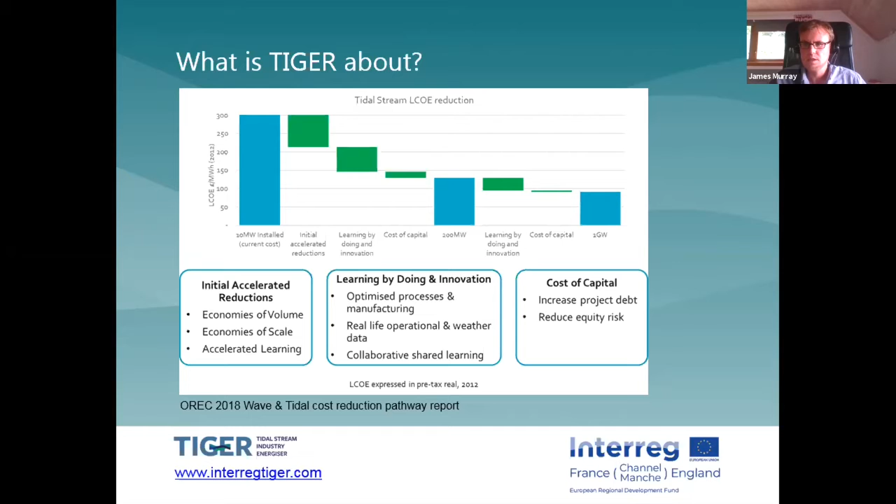So then just moving forward to some of the specifics in terms of the sites that are being developed in the project, we've got very good representation from both sides of the channel. To put it in context, there is the potential for over 4 gigawatts of tidal stream capacity within the Channel region alone. So a huge potential for a whole new generating sector. We've got representation from all the main tidal resource regions, from the Raz Blanchard and the Gulf of Morbihan, and Paimpol-Bréhat on the French side. We've got representation associated with PTEC on the Isle of Wight.

And we've also got other strategic developments such as Ramsey Sound outside the Channel region, but a very important part of the overall program, that are also carrying out activities and testing within the project as well. So within the project is a target for up to 8 megawatts of deployment, which would be very much a success because it's a reasonably short project to consent projects, to build machines, and to commission those projects, and 8 megawatts would be a great contribution towards accelerating the sector. But following on from that, a huge potential to consent further sites and see further deployment of arrays after the project has completed.

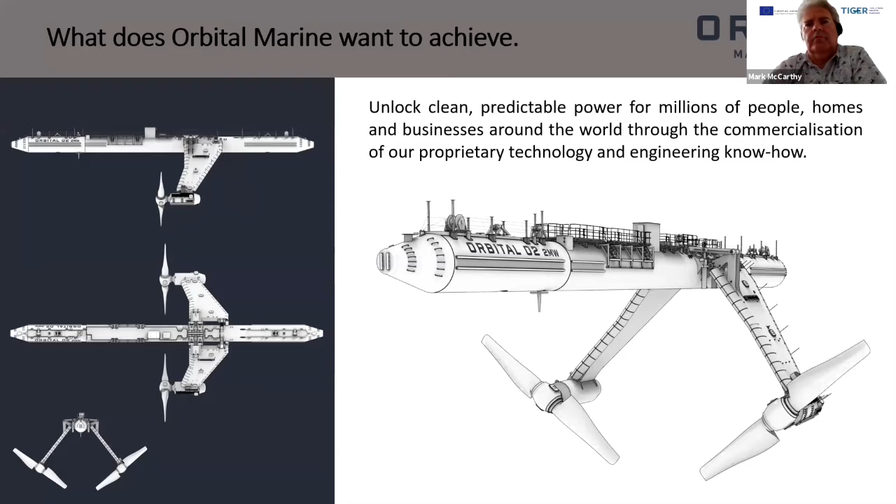So I'd alluded to our first breakthrough project in 2016. This was, at its time, the world's largest tidal turbine at around about 2 megawatt rated. So there were 2 1-megawatt nacelles, each with 16 meter rotor diameter rotors. For that particular device, we had stall control rotors, so variable speed rotors that allowed a relatively simple PTO within the nacelle, rather than moving to variable pitch,

which we believed at the time was a step too far in terms of development. We didn't have the resources at the time to develop a pitch system. There were plenty of other challenges and problems to solve before getting to that stage.

So the SR2000, or SR1-2000 as it was rebranded, was a 500-ton machine, and the hull structure is formed of sub-arc welded cans. So it's a tubular structure that is fairly well suited to automated rolling line processes.

The leg structures underneath are beam structures in simple terms, but it was all a fabricated structure, and the same with the nacelles. The tube structure, I think, weighed about 230 tons, the legs were around about 20 tons, and the nacelles, just the steel work, were around about 15 or 20 again.

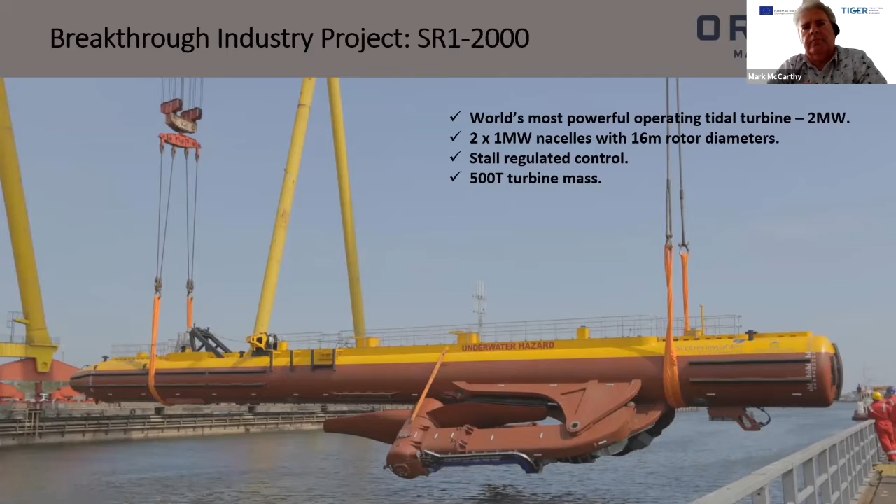So, Mark, do you want to talk about a little bit of construction philosophy? Yeah, move on to the actual cross-section of the turbine. As William said, the key here in terms of manufacturing was to obtain a design that worked for the supply base. With the work that the team had already done on the SR2000, we knew what diameters would work for our various suppliers in Scotland. So we kept effectively the same hull diameter.

And William and the mechanical team had done the design of the turbine in accordance with its structural integrity, what was required to meet the objectives of a 25-year life cycle. What we were able to do then was to develop a construction strategy for the fabrication of the O2 turbine. We broke it down into modules, in effect, and went out to talk with the supply chain about their capabilities.

So we were trying to match the capabilities of the supply chain within Scotland and the UK to the capabilities and the engineering requirements of the O2 turbine. So what this meant basically was to understand what the craneage, what the door width, what transportation requirements were for the various suppliers, so that we could optimize the size of the individual components for their manufacture.

Certain elements of the O2 were fabricated and manufactured in-house. The blue elements that you can see on the slide there were actually our own design. We actually manufactured those skids in our workshop in Orkney, but the fabrication of the steel skids underneath was done locally up in Thurso. So it's not just the large fabrication of the structure, but we've also got a large amount of smaller fabrications, both within the turbine itself and also outwith the turbine.

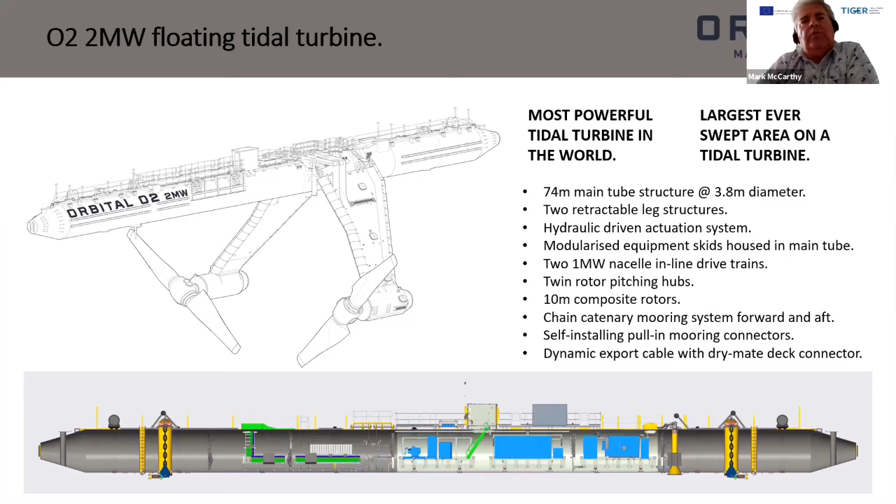A good example of this is on the screen at the moment. This was done by competitive tendering and was manufactured on the island of Anglesey by a company called Faun Trackway. These are 4 anchor baskets, gravity baskets, that were fabricated in Wales. So the design again gave us flexibility to go to various suppliers, both in Scotland and the UK, to enable us to get a competitive price.

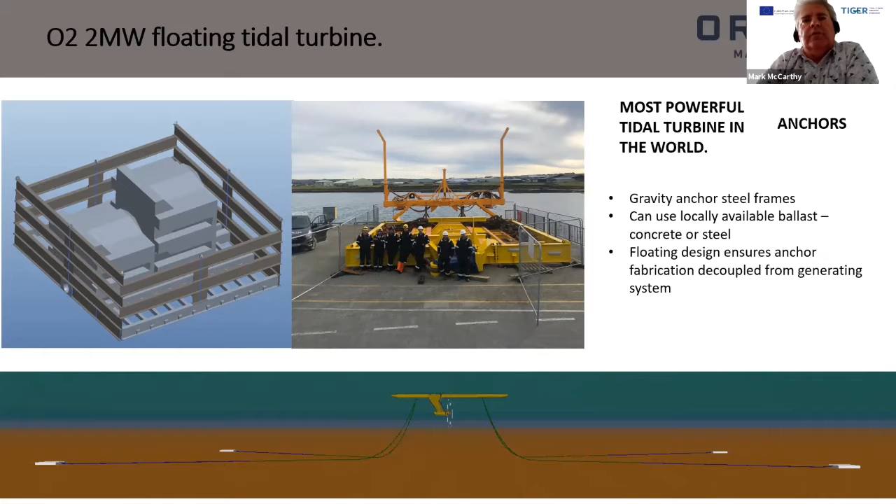So moving on. When we come back to the larger fabrications, as William said, we have a structure that is required to meet the engineering integrity. So William, if you want to explain how we decided to split the turbine down into the various sections. Yeah. Okay. So Mark pointed out there the whole strategy behind the design and the tendering. The way that we broke it down was to try and avoid limiting ourselves to one particular destination, so we could cast the net as wide as possible.

So with the superstructure for the O2, we broke the superstructure down into 4 chunks that were all within the road transportation limits. So the width was considered, the weight and the length of each section.

This also applied to the legs, and we've also considered it for the nacelles as well. Now, this allowed, I think, a good number of different people to have an opportunity to get involved with the rolling of the cans, the fabrication of the legs. The fabrication facilities can be inland or coastal. We haven't been limited to just having large quayside facilities.

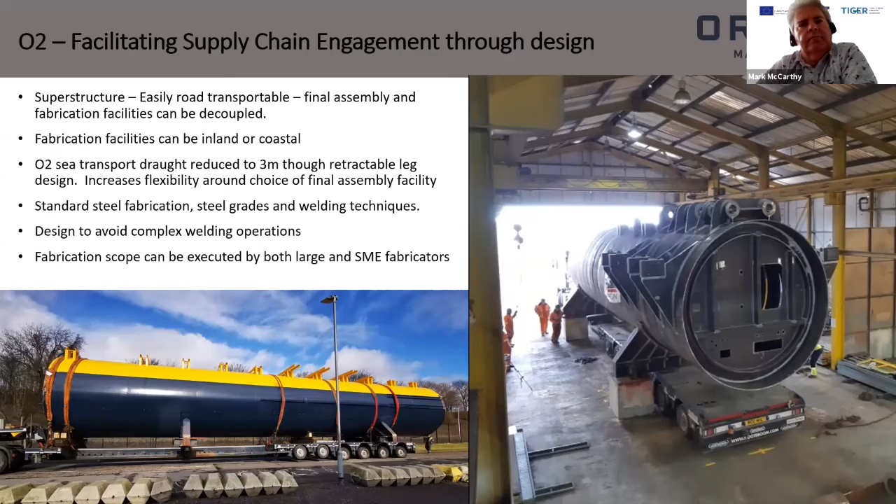Space and access requirements for welders. We've really tried to make lives easier for the welders, rather than have people going into a horrible cramped space with poor access, because all that does is cost money, and it just creates an opportunity for more weld failures, which can cause severe disruption in the build process. You really just want to avoid it from design, rather than having to rely on the best welders and luck as well. So all this work, I'll let you go into a little bit more about the contract strategy.

Yeah, obviously, in addition to standardized techniques, as William's explained, we also went for standardized contracting, an oil and gas type contract that people were familiar with. And the net effect of casting the net wide, standardizing the design and using techniques that people were familiar with is we ended up with a very wide supply base within the UK. A lot of Scottish content, Gray Fabrication, TEXO here in Dundee, but we've also got contractors as far afield as Gosport and Anglesey. So basically, UK supply chain is very well represented on the O2.

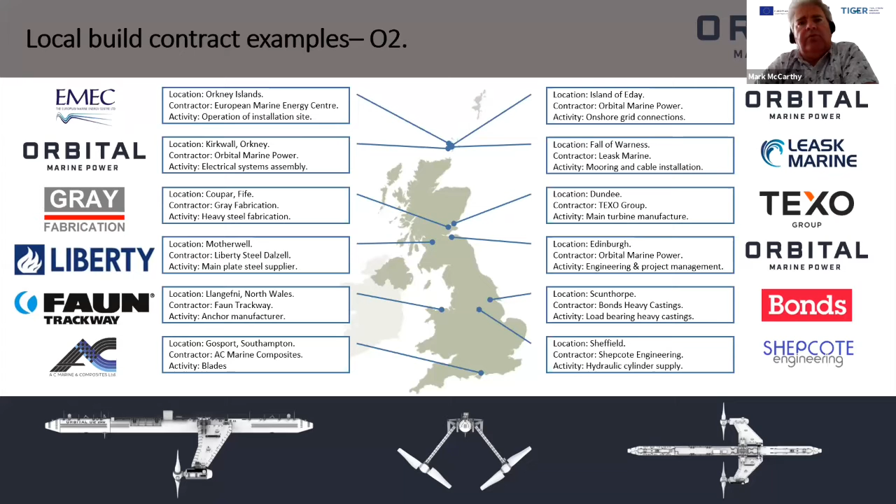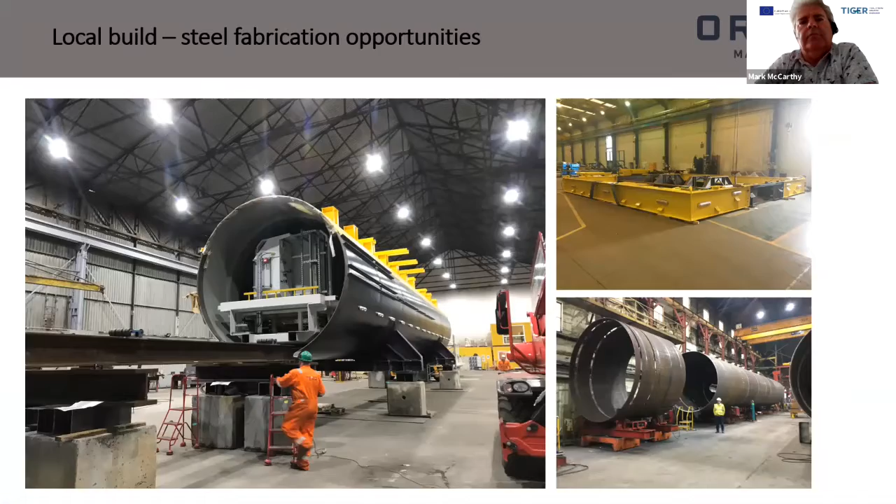Some pictures of the various steel fabrications in manufacture. You can see William there adding scale to the size of the cans on the bottom right. But we've also employed European contractors. The powertrain, which sits on the end of the legs, is actually manufactured and assembled by one of our partners, SKF. So they've got components coming from Sweden, from Germany, Czechoslovakia.

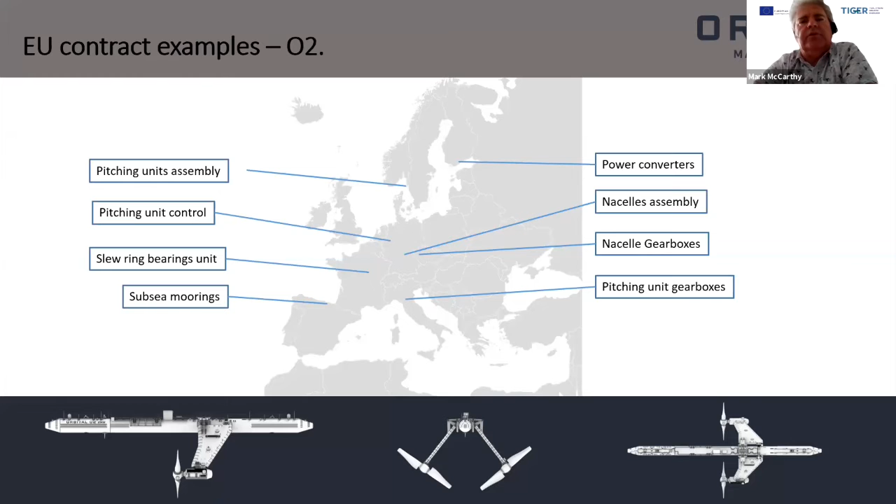And I'm glad to say, actually, all of the components are moving around Europe now, heading towards Germany for assembly in a manufacturing plant near Schweinfurt in Germany. So all of these components were supplied under one major contract with SKF. Yeah, you can see an example of some of the components courtesy of SKF. We've got the gearboxes, top left, and the gearboxes arrived in Germany fully tested.

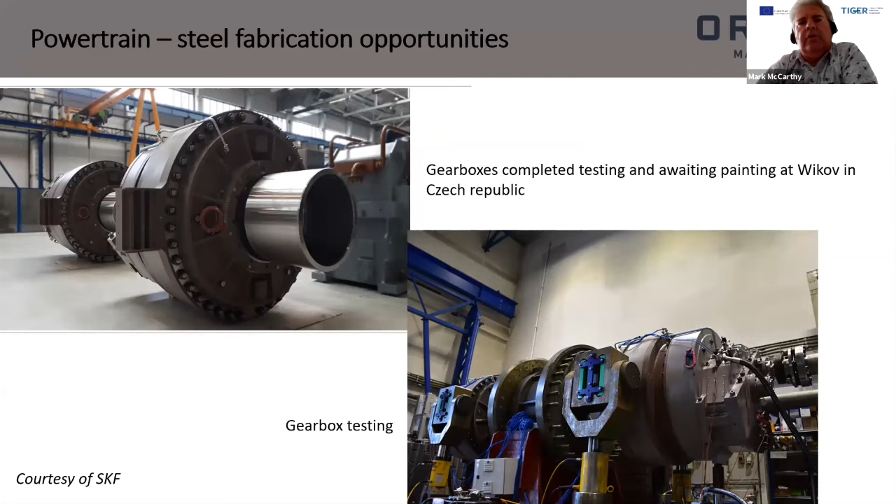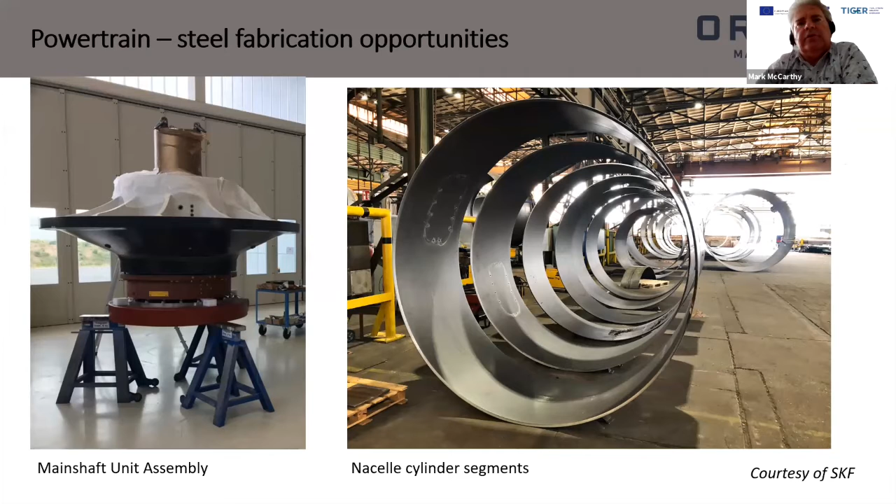And again, some components which have now arrived in the assembly hall in Germany. We've got the main shaft unit, which has been assembled and tested and has arrived in the assembly hall. You can see on the right-hand side an example of fabrication from one of our German colleagues. They are manufacturing the nacelle fabrication in Germany for SKF.

So individually, when we're developing a single turbine, that brings obviously capability and capacity into focus. But when we move towards larger volume, then obviously the problem becomes a little bit bigger. It basically becomes a space problem. So in addition to the components being quite often at the maximum capacity of some of our suppliers, they're also very large components. So one of the things we need to think about is how can we safely get large volume through our supply chain.

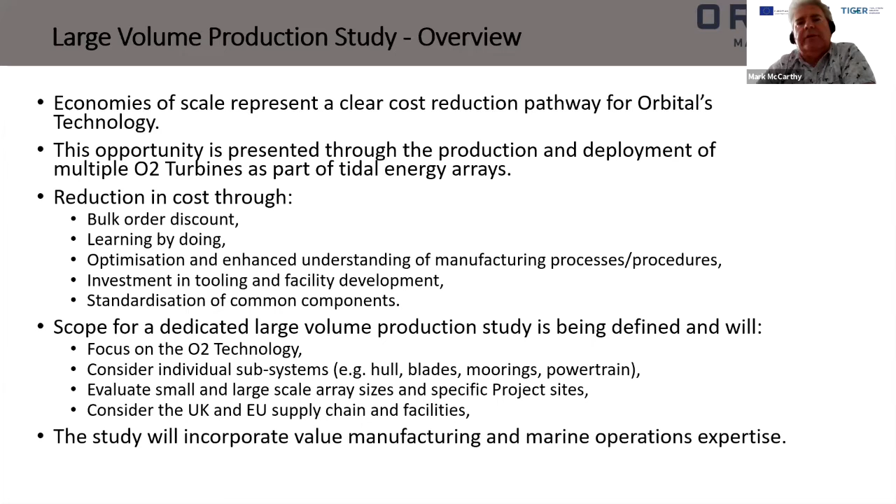So you can look at the number of tidal arrays, look at the number of turbines, estimate how you would break that through into components in a similar way as William's described. We'd need to look at the technology to see if certain suppliers have different breakpoints within the design. So we may have to alter the way that we manufacture certain turbines to suit the manufacturing cycle. But basically we will use the O2 design and the supply chain for the O2 as an example of how to do best practice. And then we'll look at the volume question as a second issue.

So we've done a study looking at the high volume with our partners, Black & Veatch. So again, what we need to do is obviously understand the political funding assumptions within the model, which gives you a geographical net in terms of where the supply chain will be sitting. And then we're going to need to go out and engage with the supply chain at every level to understand their capabilities, their capacities, and the space available.

We also need to clearly understand the timing and the schedule relating to various turbines, particularly when we get into large numbers, and literally just spend time with the supply chain, go out and talk with them, explain to them the size and nature of the components and the volume, and then we can hopefully develop a plan that works both for the multitude of turbines, but also for the supply chain.

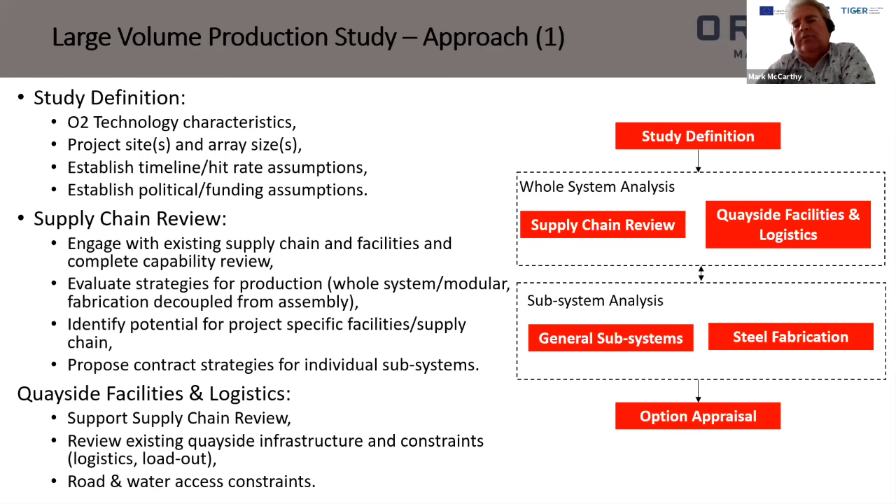The key issue for us is steel fabrication. The O2 turbine and the SR2000 before it were designed specifically as a steel fabrication. The engineering that William and the team have done enables us to break the turbine into different sections so that we can do modular assembly, and that hopefully widens the number of fabricators that could engage with the process.

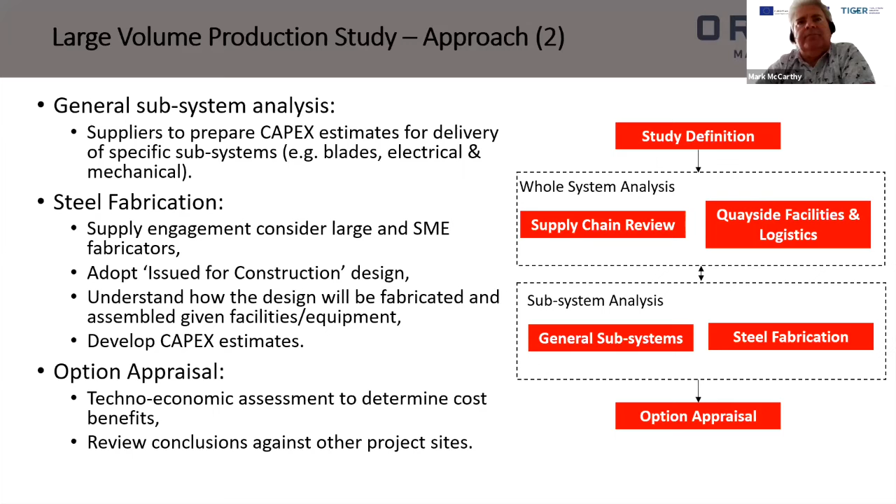So we may end up, to meet a multitude of orders, having a multiple supply chain supplying the same parts in different places, and that'll all have to be assessed in terms of capacity moving forward. So it's a large exercise yet to be undertaken in terms of high volume supply, but we think we made a good start understanding the O2 supply chain. And that concludes the Orbital presentation.

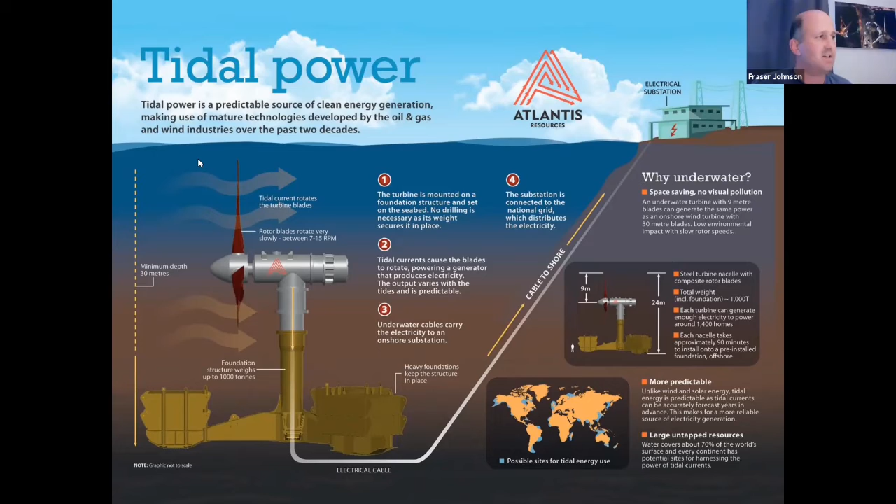In this infographic, it's a gravity-based structure, but they can also be monopiles. But effectively, the unit sits on the seabed under its own weight, in about 40 meters of water on the MeyGen site, and then literally converts the flow of the water in the same way as a wind turbine, effectively. So the main unit for the AR series, it's a 160-ton unit, designed to be installed by standard offshore construction vessel, 250-ton active heave compensated crane, that kind of size.

In the Atlantis design, the main body forms the main structure, so it takes the main load path rather than having an integral frame to take the loading. Modular design, so in this one we have the blades on the right hand side, then a nacelle in the middle which houses pumps, motors, that kind of stuff, yaw drive underneath, and then a stab into the foundation.

On the back we have a generator and gearbox, and on the back of that we have the IO pod where all the controls and instrumentation sits, and beneath that we have the turbine support structure. For the Atlantis turbine, it's all wet mates, so the turbine is installed and recovered in about 90 minutes. No dry mates, so straight interconnection.

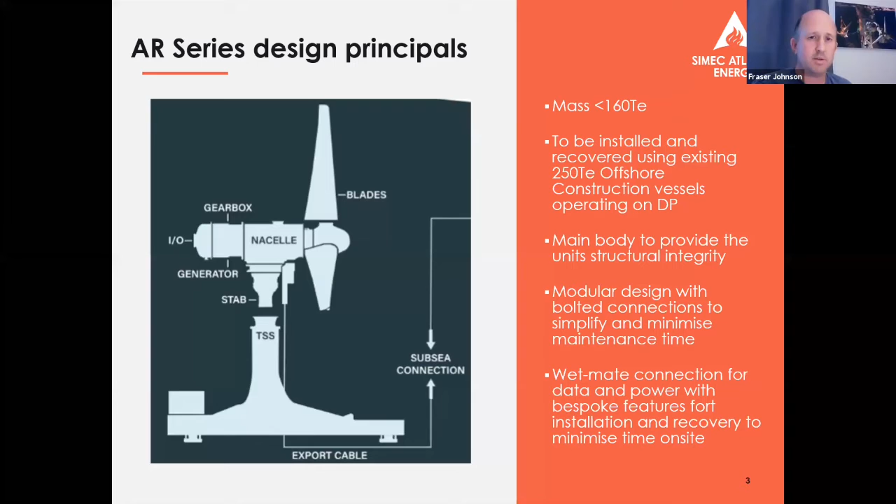The AR series really started design back in July 2011 with an installation into EMEC, and that was a 1 megawatt unit, 150 tons, and again fixed pitch. Didn't need to use the pitch system at that time. They were proving other elements. And then along came the MeyGen project. So within that we have 1 Atlantis turbine and 3 Hammerfest turbines. Not the world's first array, that was Nova Innovation up in Shetland back in 2016.

But the AR 1500 is a 1.5 megawatt unit, again 150 tons, variable pitch, and a yawing mechanism. So it actually rotates to face the oncoming tide on every slack tide.

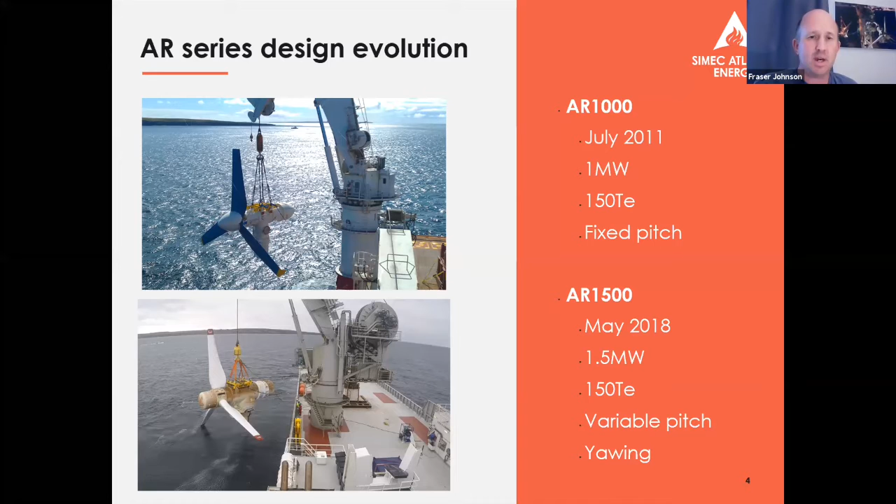As I mentioned, we also have Andritz turbines, so just to show you the comparison or difference between the two. They're still horizontal axis turbines, but just 2 slight variants from 2 different suppliers. So here we have 3 Andritz turbines. They are more akin to an offshore wind turbine. So they are an external shell keeping the water out.

And then they have a frame, a load frame on which all of the equipment sits, torque isolated. So standard generator, standard gearbox, and a water cooling system. So unlike Atlantis, where the exterior hull of the structure is the exterior hull of the generator and gearbox for cooling, this is forced ventilation, or forced cooling.

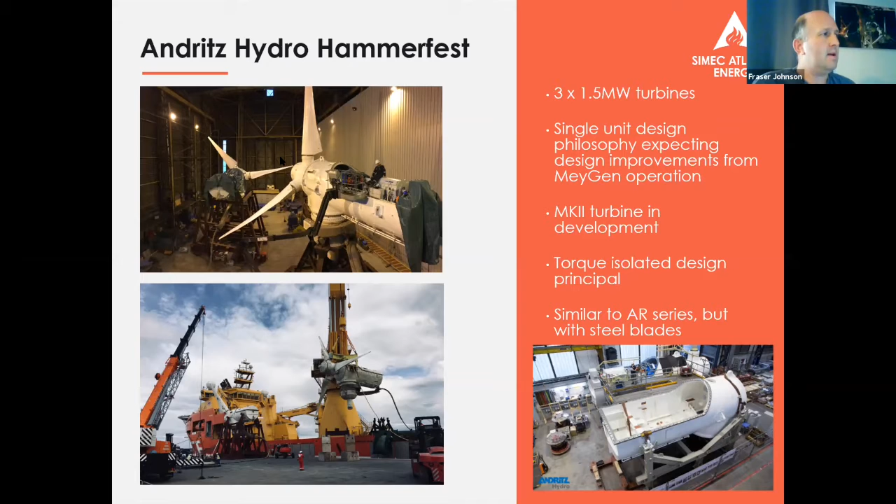So I'm going to take you through the main components of the turbine, the main modules as we call them, and highlight areas, structural elements that we buy in, and then kind of identify where Atlantis have engaged with the supply chain with regards to the components, to the main nacelle, the yaw, and so on.

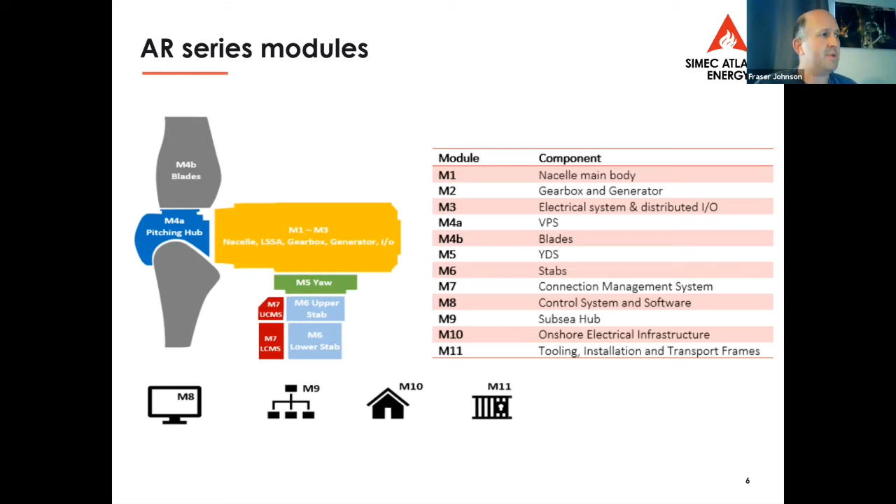So the nacelle itself, it's a 20-ton cast lower section and fabricated top section steel structure, bolted flange on both ends to take the generator and gearbox on one end, and the slow speed shaft on the other. So the photograph in the middle must be going back to June 15 now. That was at the Nautilus facility down in Blyth, a test bed owned by Catapult. That was where the unit was put together and then tested before being supplied into MeyGen.

But effectively it's a steel structure, nothing overly clever. The AR 1000 unit was all rolled steel and fabricated, whereas this one's lower section is cast. And that's really to take cost out. Going forward, a 2 megawatt and a 3.5 megawatt unit certainly looks at the entire unit being cast, and engagement with the supply chain around how that could be done here across Europe or further afield.

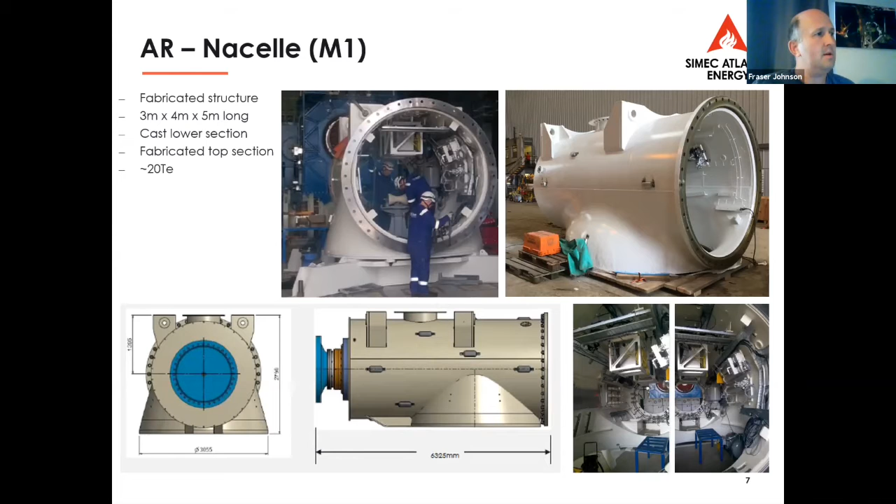Then we go on to the gearbox and the generator. So in the AR 1500 at MeyGen, we have a permanent magnet unit for the Atlantis turbine, and then we have a squirrel cage induction generator for the Hammerfest, but it's an integral gearbox generator. This came out of The Switch over in Finland. 17-ton unit, and 32-ton unit for the gearbox and generator.

And then the slow speed shaft, which is a 17-ton forged steel unit. Again, basic manufacture, forging and then machining to make the slow speed shaft. And the slow speed shaft and the generator are actually so long, and the nacelle is also so long, to balance the weight of the structure.

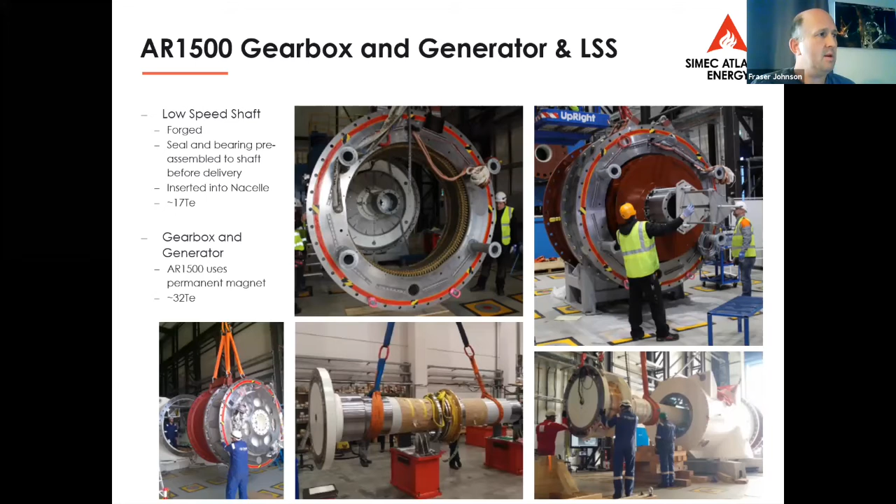So on the front, you've got the blades, and you've got the yaw drive and the hub. And of course, on the back, we have the generator and gearbox, and that balances the unit for lifting and also below water for sitting on top of the structure. So there are some details as to why they are so large. We've looked at making the nacelle smaller and making the entire package smaller, which is possible, but brings in other operational considerations.

The stab, effectively a large cast unit. The individual cast structures, so the turbine sits on the seabed under its own weight. It doesn't have any bolting or connection mechanisms. The top design is the unit from the AR1000, which was installed in the early part of 2011.

Castellations stop the rotation, take out the rotational torque, and then there are two bearing faces within the stab which take out the moment loads. Very similar to the AR1500 in its design, though its kind of configuration was quite different in the AR1500. That unit itself had a lot of integration with the connection management system for the wetmates.

So as the turbine is installed, the wetmate connection system automatically docks passively. There is no secondary actuation. So you can install the turbine and go live within a couple of minutes. You know that your connections have been made, which makes offshore operations very swift and very, very easy.

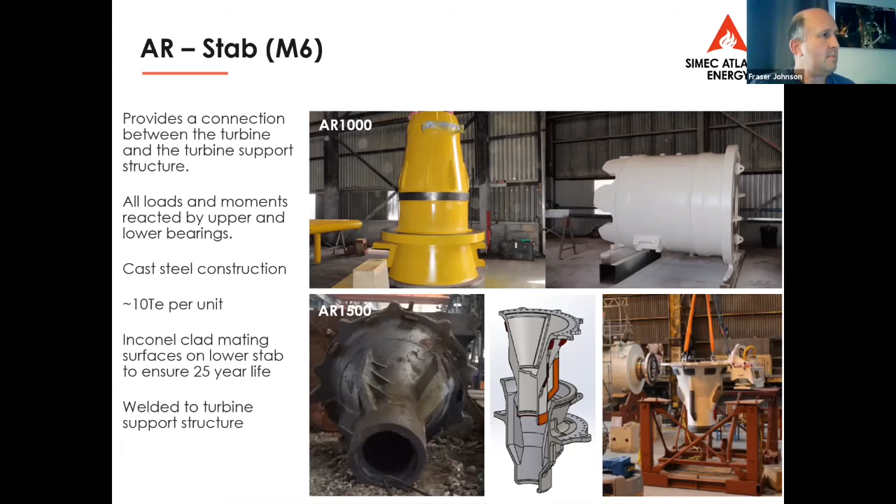VPS, variable pitch system. We've been around a number of them actually. Hydraulic, screw jack. But effectively a large prefabricated unit that comes in, pintles for the blades, and then that is bolted onto the structure, onto the nacelle in an assembly facility. So all of the units themselves for this AR1500 came into Blyth, and the unit was assembled in Blyth.

There's a current turbine being assembled in Nigg that will go to Japan middle of October. And again, it's the same process, that all the components come into Nigg. The units are assembled in Nigg, then they will be shipped out to Japan on a ship and then installed out there.

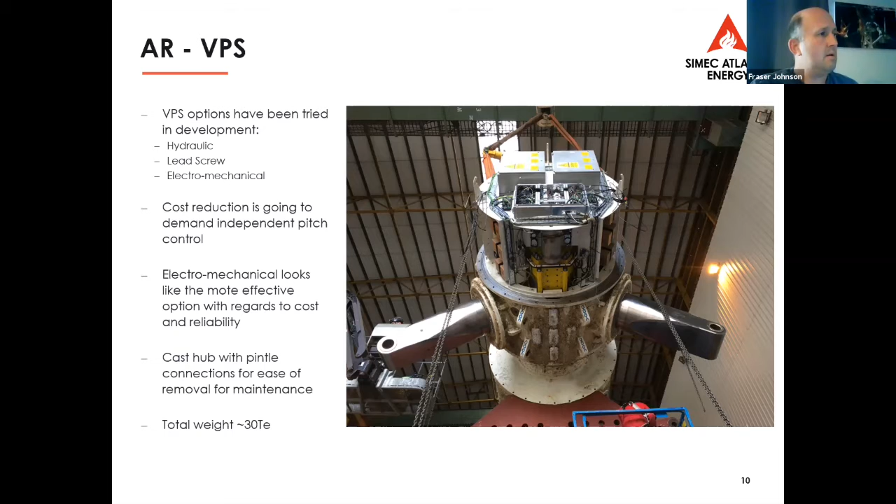Coming across to the blades of the structure. So initially back into the AR1000 GRP construction. So molded construction, these were actually fabricated in China originally. And then a test bed was fabricated by Atlantis. Again, we're going back to 2010 here, so almost 10 years ago.

So testing the blades, deflection, loading and information, to really understand the characteristics of the blade with regards to our fluid dynamic models and tidal bladed models, and also then taking that information forward into the next generation.

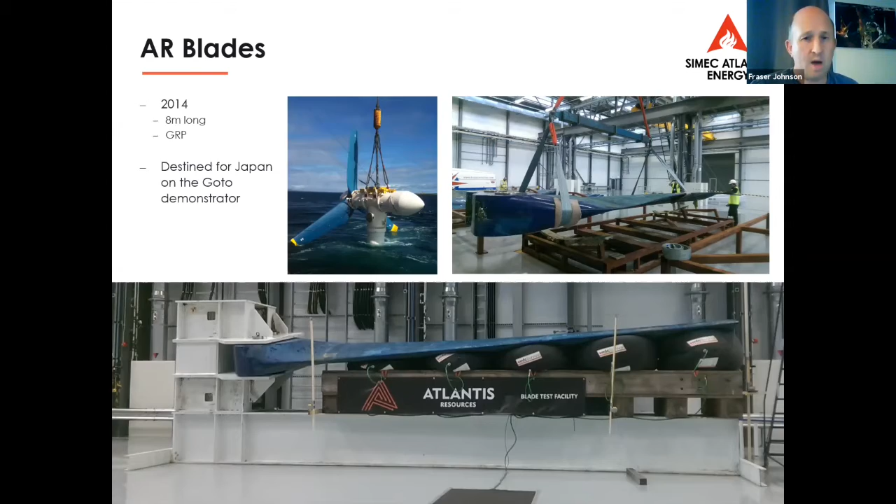The Atlantis turbine, these are carbon GRP. They're 8 meters long. They're now being progressed towards a 26 meter rotor where the blades will be about 12 meters long, pushing up towards 3 to 3.5 megawatts. The units we have here with Atlantis being GRP, the Hammerfest turbines that we have are actually steel. They are preformed steel, bent and then welded onto an internal rib structure.

Time will tell which one is applicable for operation. They have pluses and minuses across the 2 different types. But within the Atlantis design philosophy, very much going down the carbon GRP route. So the turbine you see there on the right, that's come out of the water after about 2 years of submerged operation. And we use non-emitting biocide, so silicone-based antifoul on the blades. And then the main body just has a coating of epoxy paint and anodes.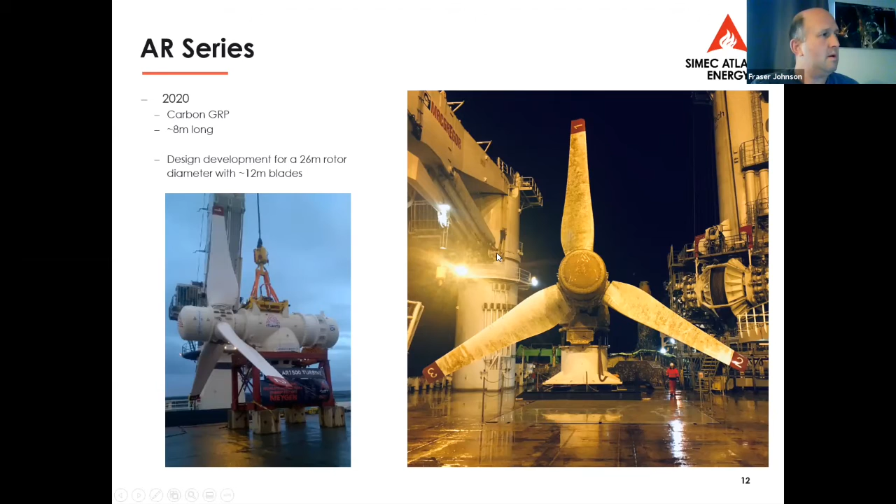Foundations. The two different turbines that Atlantis have done and the 4 turbines that MeyGen have done in the Inner Sound, they've all been based on gravity-based structures, primarily for cost and risk. The first unit went into EMEC and had to be decommissioned after it had finished its operations, which was about 10 years actually. And the units going into MeyGen, again, they were 25-year design life, but installing large monopiles in a high flow tidal environment had never been done before.

The jack-up vessel there you see is the Neptune. That was the first time anyone had put a jack-up vessel into this kind of environment and then actually conducted construction works on it. A lot of work was done to engineer that process and to make that process safe. But effectively, the foundations that we have at the moment are 230, 250 ton structures. And then we plonk 400 tons on each leg. So they soon come up to 1,400 ton units.

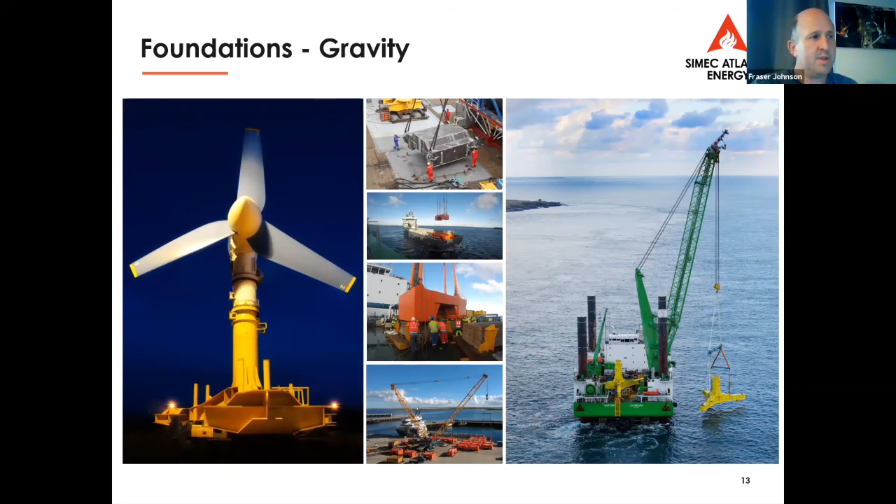Going forwards, we know that that's not economic, and we know that we have to go away from gravity-based structures and moving into monopiles, but that brings questions around installation process and work to be done with the likes of DEME here and GOC as to how that would actually be achieved.

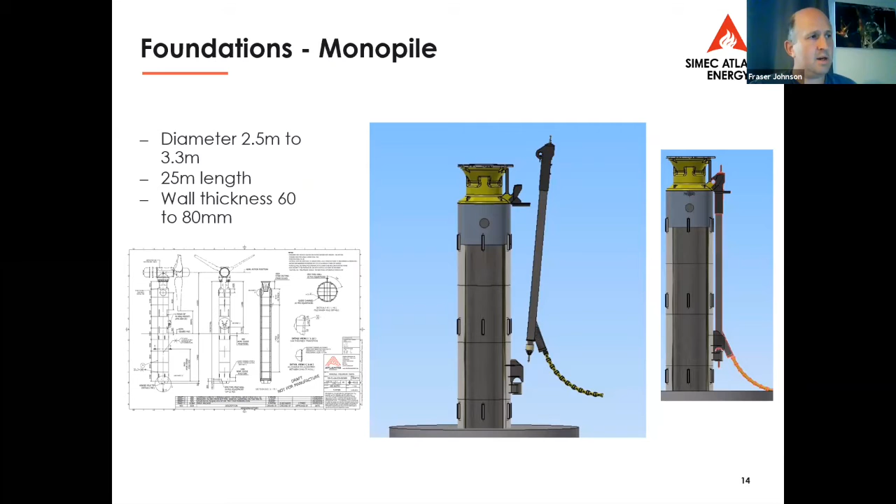To give you an idea of the monopile, we're talking about 2.5 to 3.3 meter diameter. The largest we've seen is around 4.5 meters, depending on the sites and depending upon the geotechnical information we get from the seabed. About 25 meter in length, wall thickness 60 to 80 millimeter, but rolled steel, nothing unusual, nothing too complicated. And then installation with jack-up vessel, drilling and the like to put the unit onto the seabed.

We've talked about reducing the cost of energy, and one of the aspects that we certainly see within MeyGen and Atlantis certainly have been following is the wind model, where you reduce the number of systems to reduce cost alongside reducing the materials, knowing your loads and knowing your forces, understanding your fatigue life and putting material where you need it and taking it away from other areas.

So one of the ways in which we see the technology progressing: within the MeyGen array, all of our converters are onshore. So any routine maintenance we have to do on the converter or the cooling system for the converter or our switchgear is all done on a shore-based system at Ness of Quoys. And at MeyGen at the moment, we have individual cables for each of the turbines.

The way in which we see that going forward is certainly work that's been done by GE down in Rugby, multiple turbines to a subsea hub, and then individual cables to a common converter and transformer on shore. So that removes a lot of your offshore cabling. It removes a large number of converters and takes it down to one, and the number of systems in the offshore operations is much reduced.

So the subsea hub you see there on the right was installed 28 days ago. That's now on the seabed at MeyGen, operating in conjunction with the Atlantis turbine. It's a proof of concept, proof of demonstration. We know we can put things on the seabed, but the orange elements you see on the right and left-hand side, that's the wet mate connection system for the turbine.

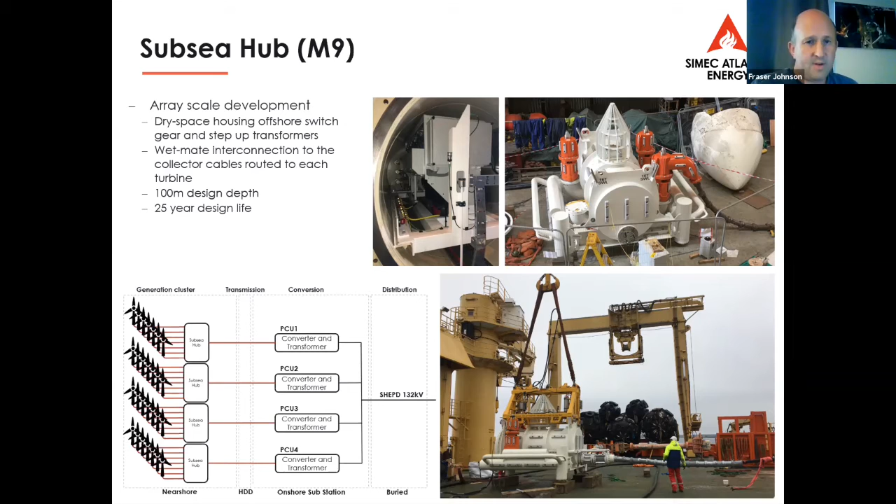So it's kind of a short presentation on this one, but overall, looking at the kind of components that we see within the system for MeyGen, or for the Atlantis turbine, you really have the nacelle, which we know we can make better, and with interest and input from the supply chain, developing and building that, we know we can achieve.

We've already looked at the structural size, frame size, if you like, between the current 1.5 and going up to a 3.5 megawatt turbine. Blades get bigger, loads get a bit larger, so the nacelle will increase in size a little bit, but we don't expect it to get appreciably larger, having done all that work already. Pitch system, again, steel castings and additional components are in there.

Blades, GRP, carbon, we have designed and built those blades. That was done with the composite lab down in Bristol. We know there's work there to do on volume manufacture. Yaw drive, again, it's a drive system, mechanical seals, castings and fabrications and additional components. It's volume manufacture. There's nothing really complicated in that structure.

The stab is probably the largest unit that we have. This is steel casting. We know we can do better there. Those units were a one-off for the first AR1500, and we know there's improvements to be made. The subsea hub, steel structure to tube, put on the seabed, so nothing very complicated. Could be a casting, certainly when we get a bit larger, to try and reduce some cost, but it doesn't have to be.

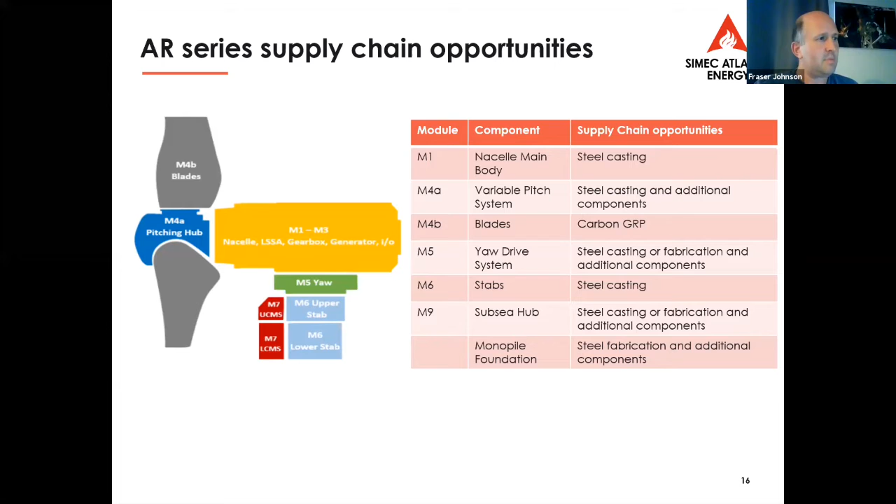The last thing I have for you is just an infographic. Excuse the infographic on this one. So on the left-hand side, we have the MeyGen project, which is really 4 units. It's the world's largest array, second in installation to Nova. We've now got about 81,300 hours on the clock for those turbines. We've now put 31 gigawatt hours of power into the grid, and we continue to do so.

And just to give you a comparison, 31 gigawatt hours is more power than tidal stream and wave have done across the world to date. So we more than doubled that number. The array cost 51 million at the time. It was an expensive project because of what it was. It's a Pathfinder project, helping the industry move forward and understand its risks and its problems, and helping the industry really showcase what it can do as predictable power.

To give you an example, the turbines last month and certainly over the last quarter have generated power at an availability above 97% across the array. So we know what power we're going to get. We know what's going to turn up. The tides are very predictable in that fashion. So MeyGen Phase 2 is progressing. We have already got consent for another 86 megawatts in total, so another 80 megawatts can be installed. And we're looking forward to the next, hopefully, CfD round where we can actually make a difference and make a bid on reasonable footing.

Within TIGER, we have the Alderney Race project, which is 4 turbines, 12 megawatts, so 3.5 megawatt units offshore, 12 megawatts onshore, then a subsea hub and a cable onshore. That project is working through TIGER to consent the site. It's already been consented by Alstom some years ago, and that consent is being transferred to Normandie Hydroliennes, which SAE is a joint venture partner of, looking to use Atlantis turbines.

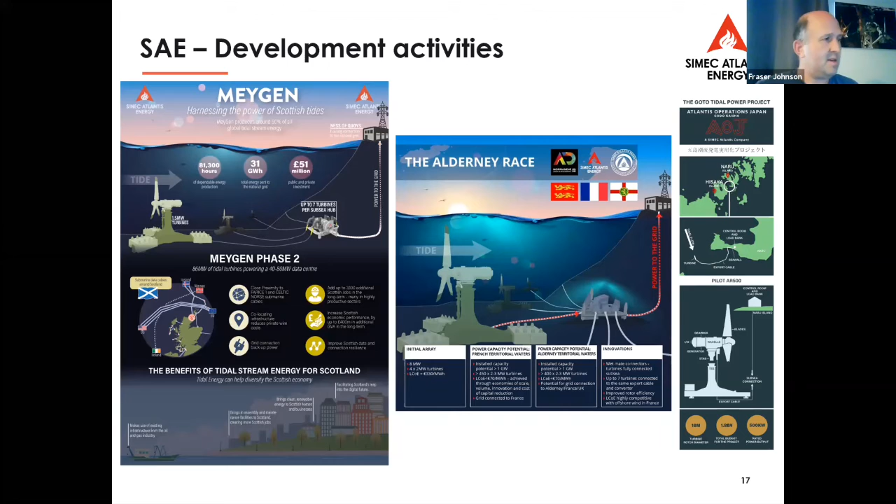And then the final one that I've mentioned is the Goto project. This is a 500 kilowatt demonstration unit, which is a precursor to hopefully an extension of that contract, looking to install or upgrade that unit to a 1.5 megawatt unit. And this is demonstrating tidal in Japan and really demonstrating that the technology can work and it has the reliability and availability that Atlantis says it does. I think that is it for me. So slightly quick, slightly whistle stop.

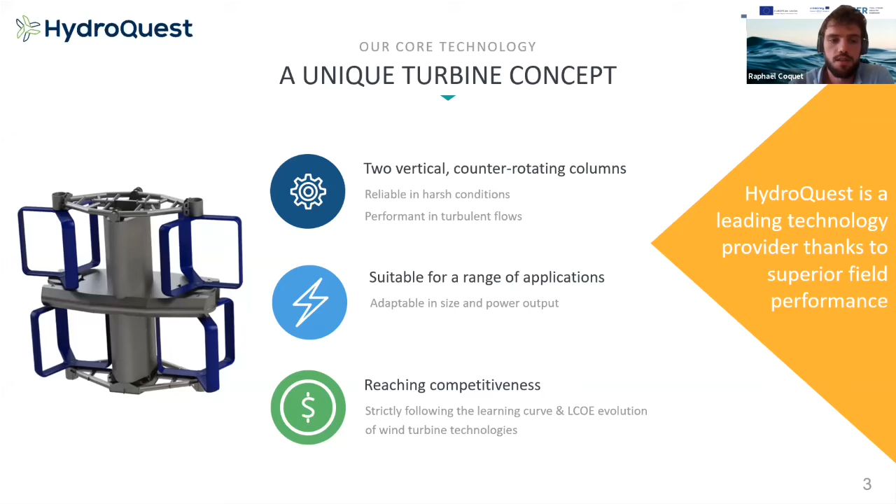For your information, HydroQuest is located in France, in the Grenoble area, because we have quite a lot of know-how and knowledge in the hydropower industry, and the company was created 10 years ago. From our creation, our main activity was to design and deploy hydrokinetic river turbines. We deployed our first one in 2013.

And then we started to look at the tidal industry in 2014 and signed a partnership with CMN shipyard. I will have some more detailed description on this later on. In 2016, we launched the main project in our tidal development, named the OceanQuest project, whose objective was to deploy our first marine turbine. And this first prototype turbine was deployed last year in the Paimpol area.

So at this time, HydroQuest is operating only in France, but we have the intention to take our technology worldwide and are currently investigating some potential locations around the world in the main tidal turbine sites. So we want to start with France because we have our facilities and first industrial partnership in France.

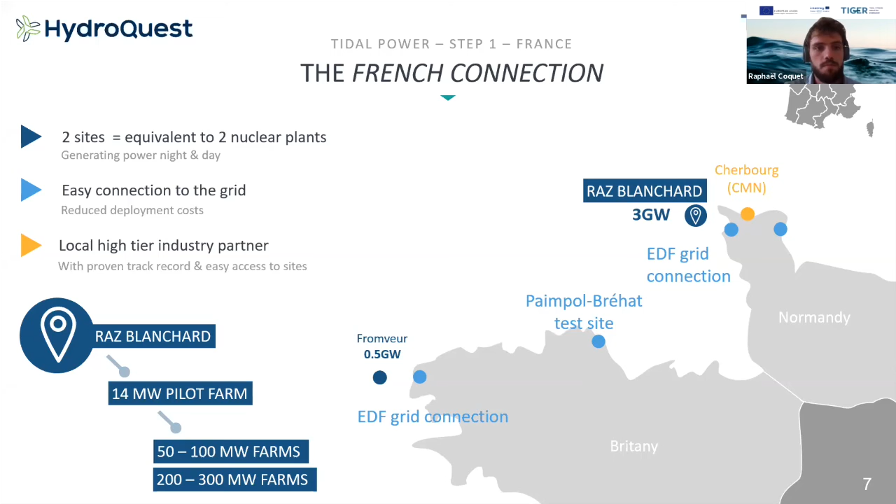Regarding supply chain strategy, we have a major partnership with CMN Shipyard, which is our main partner for production and supply chain. It's located in Cherbourg, in Normandy, in France, so really close to the Blanchard site, around 30 kilometers. It's quite a large shipyard, so it has the perfect size for our turbine design, and really good production capability for manufacturing and final assembly.

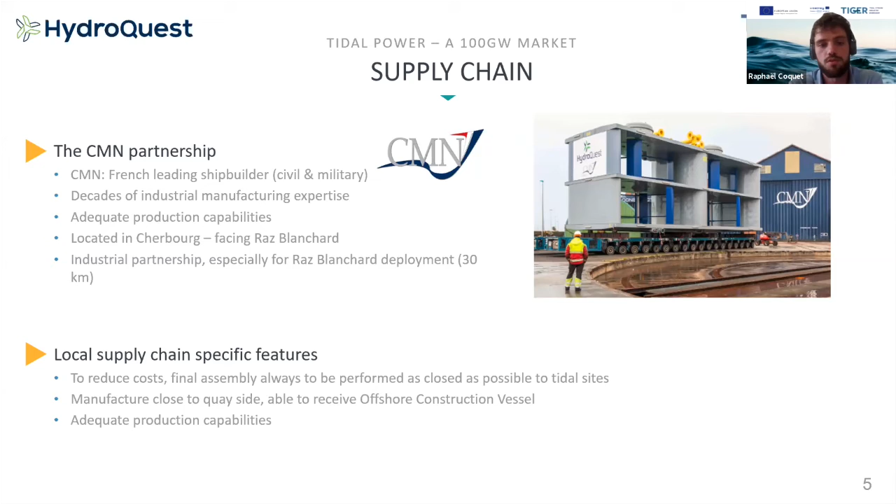One word is that our devices we have to install offshore are quite large and quite heavy. To optimize the costs, it's really important to have the final assembly really close to the final site, because the offshore means are quite costly. And it needs to be transported or manufactured really close to the quayside to be able to receive an offshore construction vessel.

So now I will present you our first project. This 1 megawatt turbine is made with 4 rotors of 8 meter diameter, 4 meters high. The total dry weight is 280 tons. And the overall dimension of the turbine is 21 meters long by 16 meters high. And for this first turbine, the fabrication length was about 20 months, with about 6 months of final assembly in the CMN workshop.

For this project, as Fraser presented, for tidal turbines which are not floating, we have mainly 2 solutions, which are gravity-based foundation and bolted foundation. And same as Atlantis, because of risk and length of operations, and also decommissioning of the site, because for this project the deployment was only for 1 or 2 years, so we have to decommission quite soon after the deployment, we chose to have a gravity-based foundation.

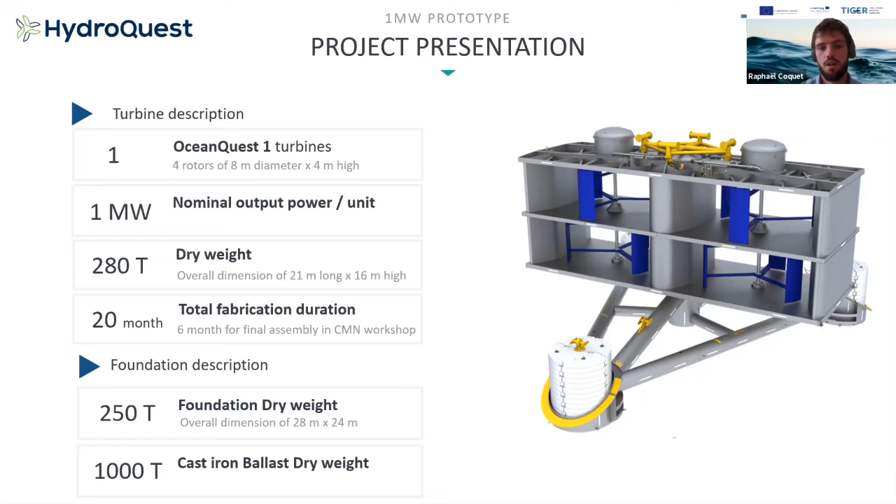So for this project, we had 250 tons gravity foundations. It's a tripod steel structure you see in the drawings, and in each foot we have cast iron ballast, and the total cast iron ballast of this project is 1,000 tons, so about 300 in each foot.

We installed it last April, and there is a mistake on this presentation, but it was a DP 400 tons vessel. It's a Norman Vision operated by Ocean Installer, and we turned it into operation end of June last year, and from this date we have 91% availability rate.

We also certified the power curve assessment following an IEC standard by Bureau Veritas. So we had this certification fully approved last July, and the schedule is now to decommission and inspect it next summer. So we will have a full 2 years of operation, hopefully.

What are the learnings about this first project? Main learnings are about the design, because the design of this first prototype was born from our proprietary design and what we used to design our river and estuary application. So the main issue with this design is that because of the lateral ducts, we have high environmental loads for angles of incidence higher than 20 degrees, which is possible in extreme environmental cases. And these lateral ducts induced large horizontal plates, and this induced quite high wave loads.

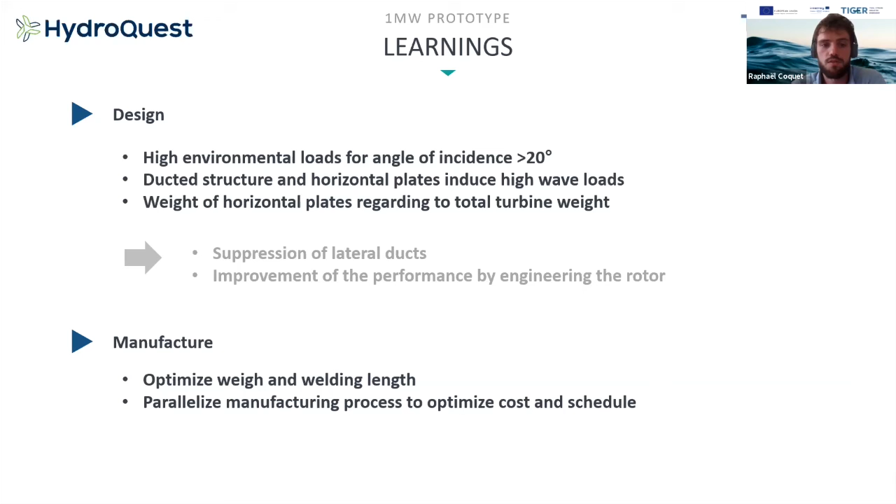And for this new generation, the main improvements are the suppression of lateral ducts and improvement of performance of this turbine by engineering the rotor. Regarding manufacture, there is nothing revolutionary. It's just a classic approach. We are optimizing weights and welding lengths and trying to parallelize as much as possible the manufacturing process to optimize cost and schedule.

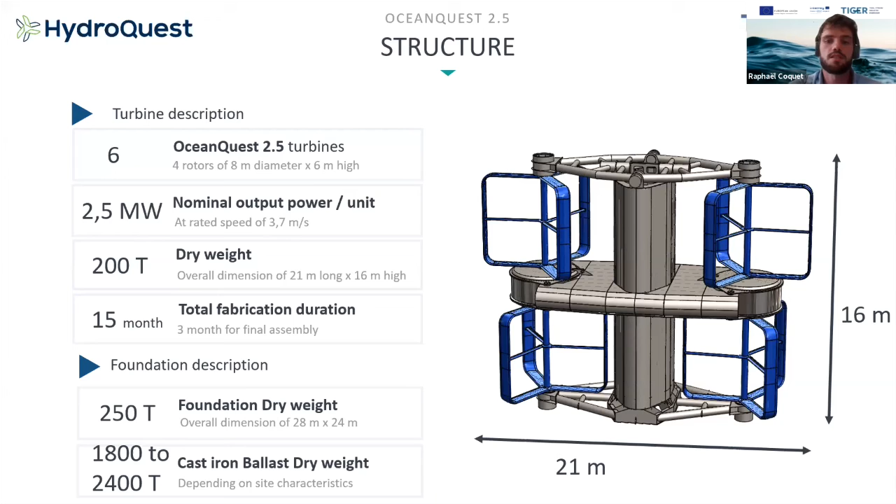So now next generation, Ocean Quest 2.5. The next generation is 2.5 megawatts nominal output per unit, and we designed it to reach 200 ton dry weight. So we reduced by 80 tons the weight of the turbine. And this allows us to use 250 ton DP vessels and to reduce CapEx and OpEx costs. So this new generation will measure 16 meters high and 21 meters length.

This picture shows you the sub-elements of the structure. This is the ducted structure, which is much smaller than our previous project. All the elements are made in carbon steel. We have 5 elements. The lower plate weighs 13 tons, and the upper plate also 13 tons. And you have the overall dimensions of these elements.

The central duct weighs 13 to 15 tons, and the central plate weighs 23 tons. So this is all steel manufactured. And it's mainly made with plates from 6 to 15 millimeter thickness.

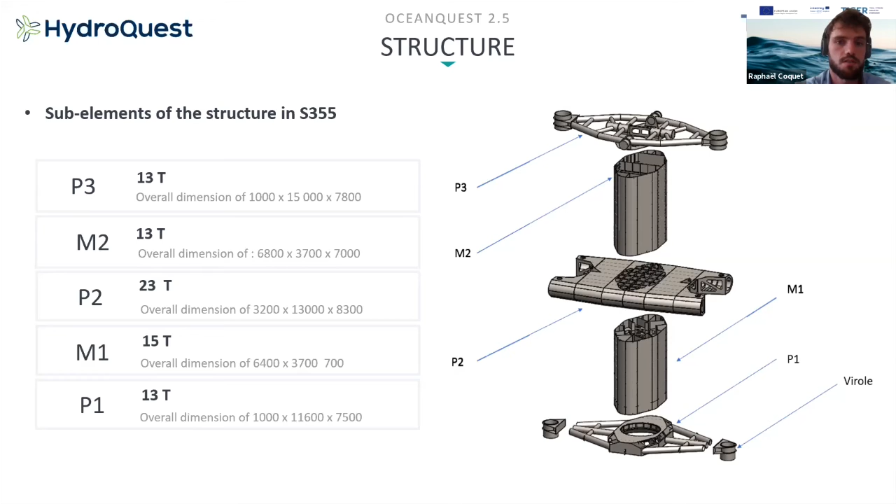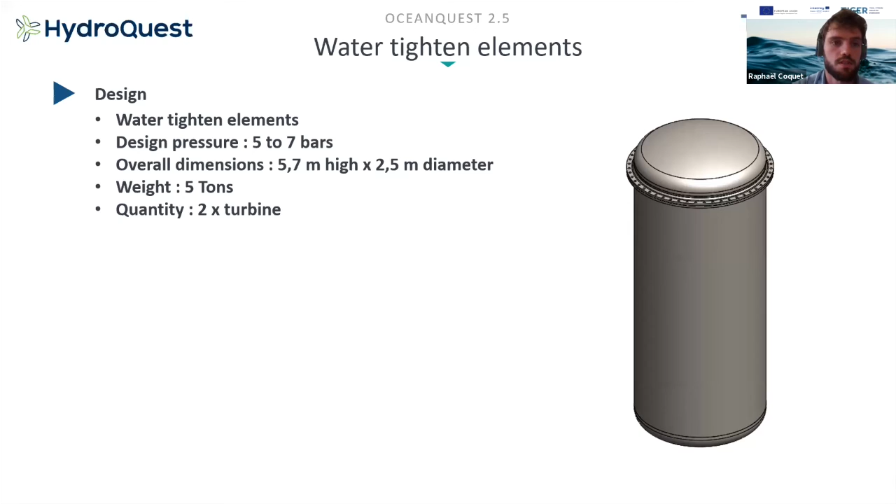We also have watertight elements to integrate our conversion elements, our electrical system. The design pressure is 5 to 7 bars depending on the site location. The overall dimension is 5.7 meters high and 2.5 meter diameter. We have 2 watertight elements per turbine. The weight of each is 5 tons.

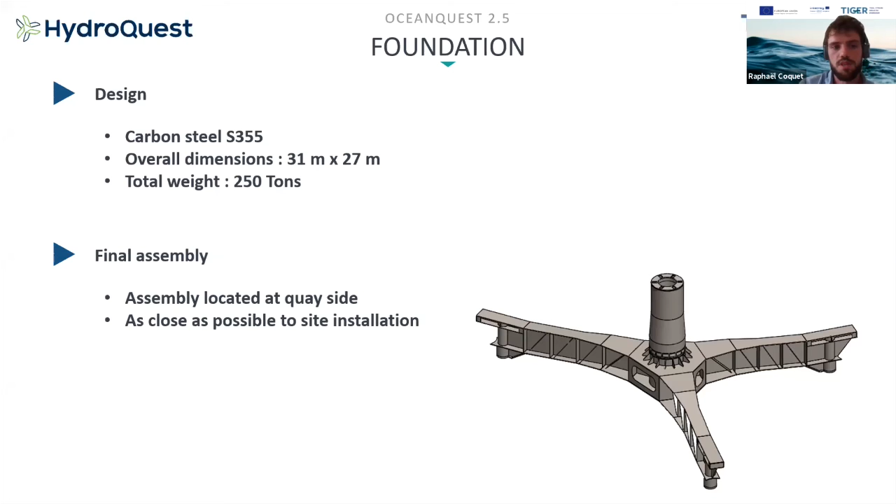Regarding foundation, for coming projects we still plan to deploy gravity-based foundations. You have here a picture of our gravity-based foundation, which is made in carbon steel with an overall dimension of 31 meters by 27 meters and a total weight of 250 tons. The final assembly needs to be done at quayside. It's really better not to transport it after it's fully finished, and it needs to be done as close as possible to the installation site.

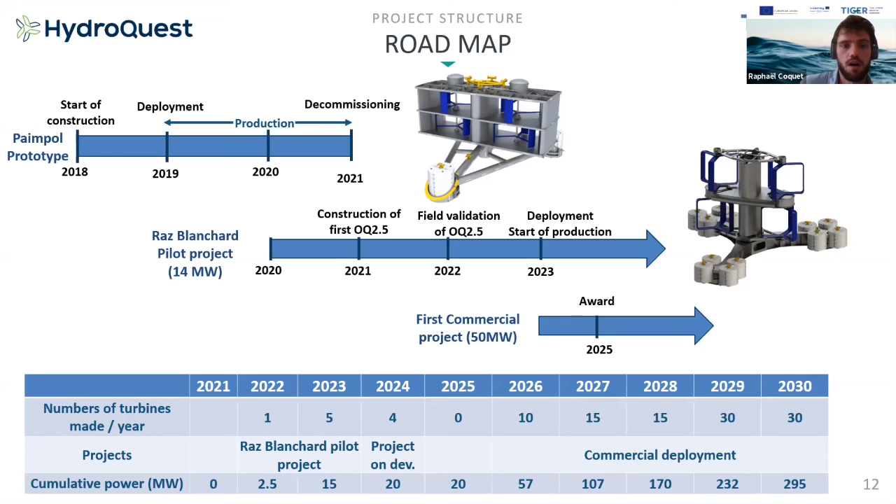Our roadmap. At the moment we are developing a pilot project in Raz Blanchard of 14 megawatts with 6 OceanQuest 2.5 units. Our schedule is to manufacture the first turbine, starting production next summer, to have a field validation in 2022, then to deploy the whole array in 2023 with the 6 turbines, and then commercial deployment from 2026. We have had quite a lot of milestones in this Raz Blanchard pilot project, and are really confident in this schedule.

To conclude, we have quite a lot of industrial opportunities in France regarding steel manufacture, because in this presentation I really focused on steel fabrication. We have the manufacture of the sub-elements, the watertight structures, the manufacture and assembly of foundations, preferably in Cherbourg for the final assembly. We also have other opportunities regarding mechanical elements, the shafts, the bearings, and other elements I didn't mention. For other tidal sites it's more or less the same, and added to that there is the final assembly of the turbines.